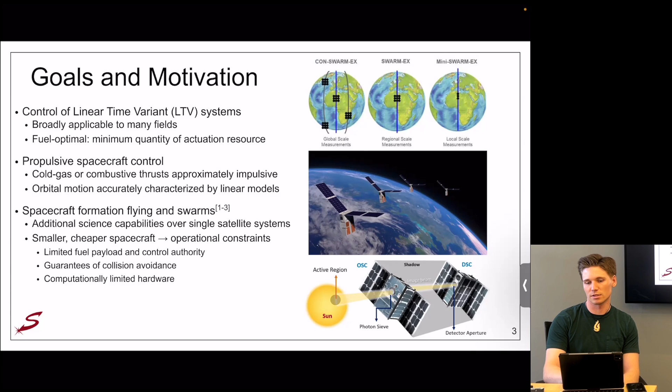So my problem statement for this work is to design an impulsive maneuver planner that leverages optimality conditions derived from reachable set theory to solve trajectories under both convex and non-convex operational constraints with provable bounded optimality and with limited computational load.

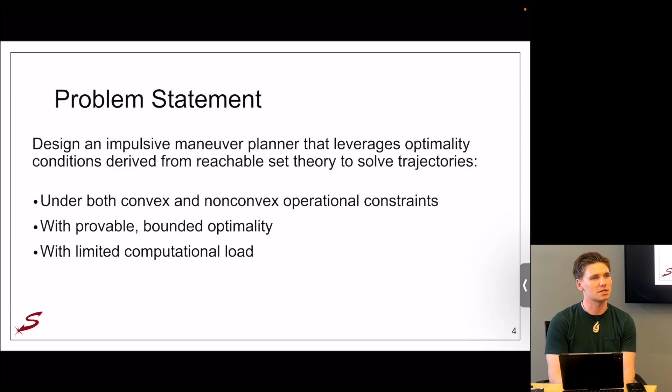Looking at the state of the art for control solvers for both unconstrained and constrained optimal control, they kind of fall into three distinct categories. Closed-form solutions are simple and computationally efficient, but their solutions are often case-specific and can only include limited perturbations and constraints. Closed-form solutions have also been demonstrated on a variety of formation flight missions, such as PRISMA and TanDEM-X.

Numerical optimization techniques, in contrast, offer a wide generality in control problem and control input variables, but they're very computationally intensive, and there's often no optimality guarantees with the methodologies, such as genetic algorithms or particle swarm tree search.

Finally, the most popular approach in literature is indirect optimization because it provides conditions for provably global optimality. It's often a more numerically efficient technique than direct optimization as well, although this can depend on the number of variables considered, as well as the optimality conditions found for the control problem. Indirect optimization techniques can include sequential convex programming, model predictive control, pseudospectral methods, as well as reachable set theory.

However, overall, the literature lacks a numerically simple, provably optimal approach for arbitrary constraints, as well as a guarantee or some metric of global optimality without a significant simplification to the control problem itself.

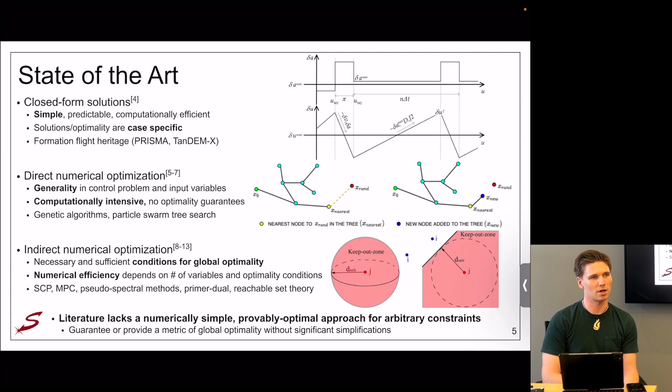So the basis of this work, as I mentioned before, is reachable set theory, which in its simplest, most unconstrained form considers a control problem minimizing the cost of the maneuvers in a control window subject to a linear time variant dynamic constraint. Again, the control actions we're considering for spacecraft control can be considered impulsive, which simplifies both the objective and the dynamic constraint to a simple arithmetic sum of maneuver quantities or functions.

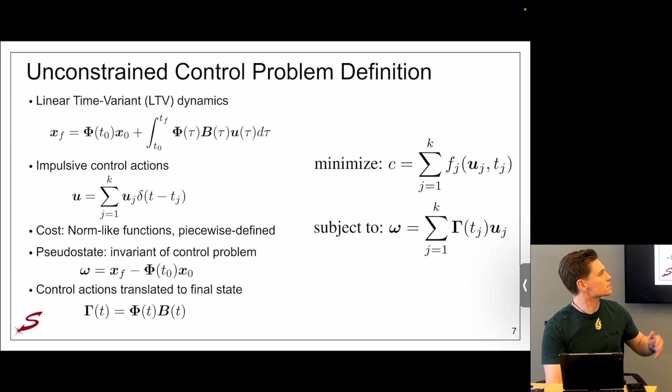The cost is the sum of norm-like cost functions, piecewise defined based on time throughout the control window. The pseudo-state in the dynamic constraint is an invariant of the control problem and is simply the final desired state minus the initial state propagated over the control window. Control actions are similarly translated from the time they occur to the final state, which arrives us at this simple base control problem.

Reachable set theory primarily consists of two sets. The set S is the set of pseudostates omega reached by any single action of a given cost in the control window; S is at specific times, but also can be at times throughout the control window. S star is the set of pseudostates that can be reached by multiple actions of combined cost equal to C. It can be shown that S star is the convex hull of maneuvers in S throughout the control window. This then makes lambda a very important quality of the reachable set, because lambda is an outward normal of a distinct contour of the convex hull.

And this contour lambda is the optimal lambda if it intersects the desired pseudostate at minimum cost. So this control problem we were showing before can be more efficiently solved as its dual, as a maximization problem. We were effectively trying to find this contour of the reachable set that intersects the desired pseudostate at minimum cost.

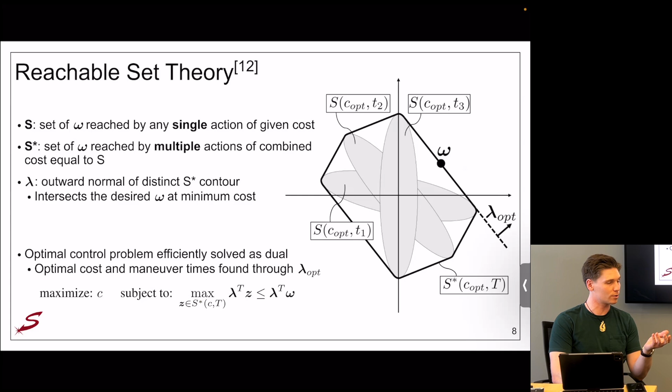Lambda then will give you both the optimal cost of the control problem as well as the optimal maneuver times and directions throughout the control window, all through one single variable. So reachable set theory alone, in its current state, is not enough to accommodate all of these operational constraints that we're looking to accommodate.

Specifically, we need to know the trajectory and the relative maneuver timing between maneuvers throughout the control window to know whether or not they satisfy state constraints on the pseudostate trajectory or timing constraints in between maneuvers. Therefore, consider time ordering the maneuvers considered by the reachable set theory throughout the control window.

And it can be seen that time ordering these maneuvers means that there's no loss of generality of the reachable sets, because simply time ordering the maneuvers does not change the shape of the convex hull S star or its contours that may intersect a desired pseudostate at minimum cost. Therefore, the full control problem can be broken down into intersecting waypoint subproblems, where a waypoint is defined as a spot in pseudostate space where the trajectory reaches after the previous control actions in the control window.

I'll talk about it in a second. What this means is that you get this optimal overlapping substructure, which is very similar to that seen in dynamic programming and allows the application of the principle of optimality often used in dynamic programming, which means that the full optimal solution for the control problem is comprised of optimal solutions to each one of these subproblems.

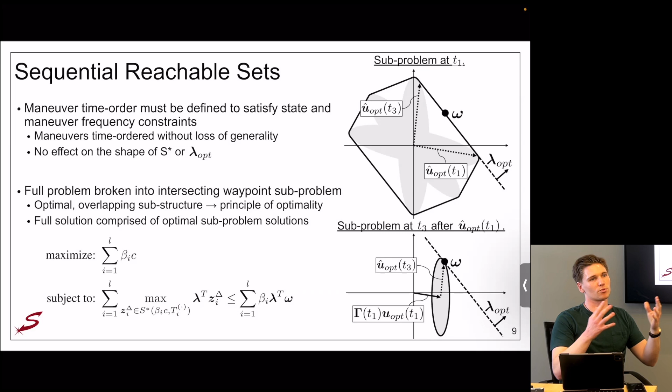If you take the optimal maneuver at T1 and set it at its optimal magnitude, the subproblem at T3 then recovers the exact same lambda, the exact same direction of the optimal maneuver at T3. And so you've then recovered the full optimal control profile. So now that we have this sequential formulation, we want to actually start accommodating operational constraints. This work considers three types of operational constraints.

The first being a state constraint, which is an area of pseudostate space which is inadmissible for the pseudostate trajectory found by the control solver to enter. This can be defined in a non-convex way, just a keep-out ellipse, or convexly as a maximum deviation from some sort of nominal state. It's worth noting that the actual definition that's used at each waypoint subproblem here is slightly more restrictive than simply the inadmissible states alone.

It's actually any maneuver that acts in the direction of an inadmissible state that is reachable given the current magnitude or cost associated with the subproblem. This is done to preserve the linear scaling of the definition of the reachable sets and the nice qualities that it has. And it can be seen that by varying the cost, you can actually recover the full spectrum of maneuvers on the boundary of any constraint space that you're looking for, simply by varying the size of the reachable set.

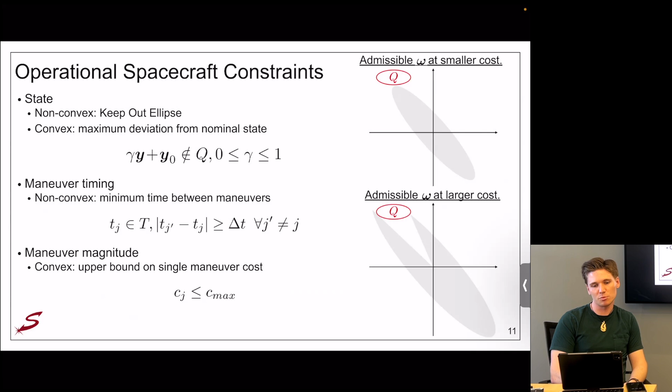Maneuver timing in this work is considered as a non-convex constraint, which is set as a minimum time in between two maneuvers happening in the control window. And maneuver magnitude can be realized as a convex upper bound on single maneuver cost.

So now that we're including constraints, these constraints can be incorporated into the sequential reachable set formulation at each waypoint, meaning that you're satisfying them at each subproblem location. So now you can solve each one of these subproblems, as I said before, without needing to convexify the full control problem. By solving each one of these subproblems, you can again find optimal maneuver locations and times depending on the location of your waypoint and the resulting optimal lambda.

But two gaps have to be addressed to make this into a full control solver. The first is that we don't yet know what the optimal size of each one of these subproblems or the control inputs may be. Specifically, we don't know what the transition between a given subproblem I and the next subproblem I plus one may be, as this is dictated by the optimal maneuver chosen and its magnitude and the resulting waypoint that's created.

To meet this gap, we have derived a set of new subproblem optimality conditions in the frame of increasing a maneuver magnitude until it is no longer optimal with respect to the next waypoint of the control problem. These optimality conditions can be realized as: a maneuver is optimal in the next subproblem if it's optimal as defined by lambda in the next subproblem, it acts in the same direction with equal efficiency to a maneuver that's optimal in the next subproblem, and it does not increase the lower bound on optimal cost. Effectively, if any of these conditions are true, the maneuver is still optimal and you have not actually realized the transition between your current subproblem and the next subproblem.

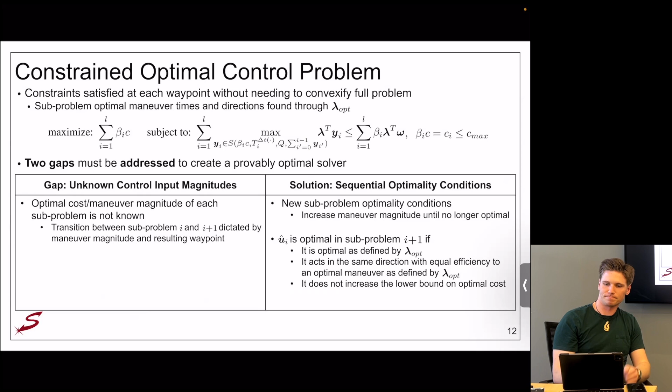The second gap that must be addressed is this constraint. Because we have added so many operational constraints to the constraint of the control problem, the constraint can no longer be expressed analytically. And actually solving this exactly requires evaluating many maneuver direction samples, which introduces a prohibitive computational load to solve the problem.

Instead of solving this explicitly, consider solving the problem implicitly as a bound on unconstrained optimality loss. You then take advantage of the numerical efficiency of solving the unconstrained problem, and then can simply check an arbitrary number of constrained maneuver samples against a user-defined suboptimality bound. As long as one of the samples that you have fits within this bound, you've satisfied the constraint.

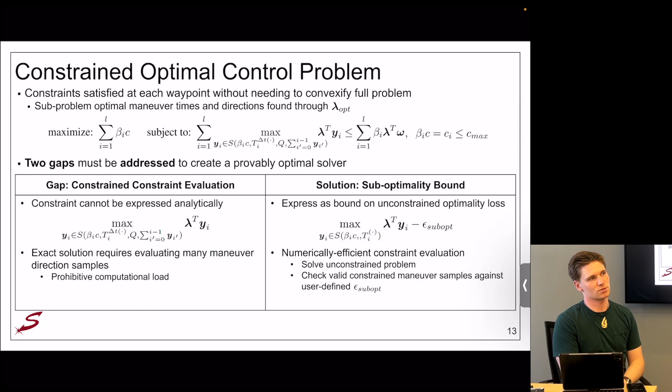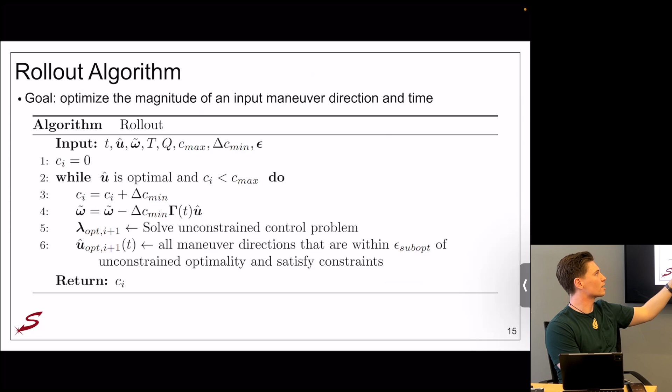So to build a computationally efficient constraint solver for DSS, it is primarily composed of two algorithms. The first algorithm, which is used by the second algorithm, is rollout, with the goal of optimizing the magnitude of a given maneuver direction and time to find this transition between one subproblem and another subproblem. You start with a magnitude of 0, and you increase the maneuver magnitude until the maneuver is no longer optimal at the resulting subproblem. So it's steps of increasing maneuver magnitude, finding the next waypoint, solving the unconstrained control problem, and finding a new set of optimal maneuvers that satisfy the constraints and are within the user-defined suboptimality bound of unconstrained optimality. You effectively continue to roll out maneuver magnitude until a new subproblem is realized.

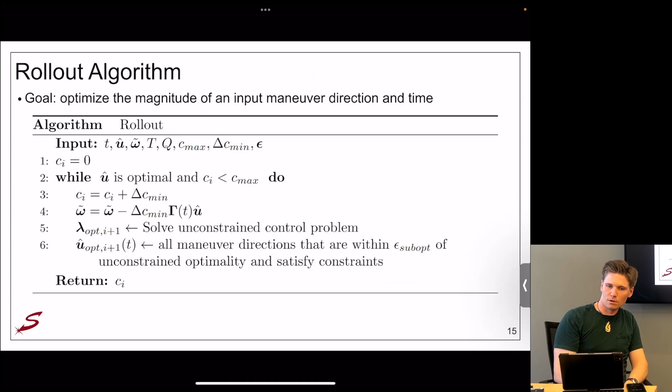The second algorithm that uses rollout is branching. The goal of branching is to solve the sequential constrained maneuvering until the remaining control problem can be solved and satisfy the constraints with unconstrained maneuvering. It begins by starting with the unconstrained maneuver plan and checking it against the operational constraints of the control problem. If one of the operational constraints is violated, the constrained optimal maneuver, defined as above with the user-defined suboptimality bound, that is closest to the beginning of the control window, is rolled out, added to the maneuver plan, and the reduced control problem is found.

This sequential time ordering that we've done before can be done either forwards or backwards in time. So to reduce time and make the problem more efficient, we can also do this backwards. So we also roll out the optimal maneuver closest to the end of the control window. We then again solve the unconstrained control problem and check it against the operational constraints and repeat this until the unconstrained maneuver plan meets the constraints and we have a full maneuver plan with bounded optimality that satisfies the operational constraints. While we're doing this, we're also keeping track of the potential optimality that is being lost by the approach.

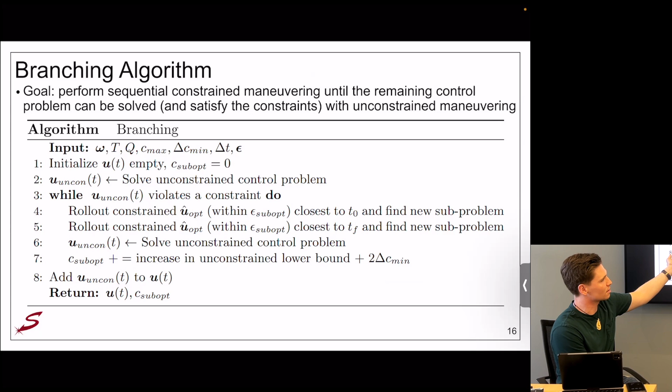This can be found at each iteration by increasing this value by the increase in the unconstrained lower bound due to using this maneuver sampling process, as well as the maneuver sample size, delta C min, used to find the maneuver magnitudes in rollout each time.

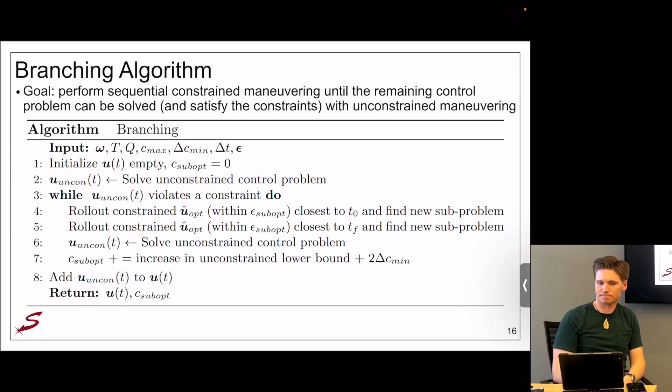To simulate and validate this algorithm, I'm going to be using an example test case of distributed space systems, which is defined as deputy relative motion linearized about a non-maneuvering chief reference orbit. These systems are commonly parameterized by relative orbital elements for the deputy state, which are defined on the right there in radial, tangential, normal relative motion space for bounded relative motion.

Each one of the scenarios I'll be showing today consists of a Monte Carlo simulation of 200 runs with randomized pseudostates and operational constraints. The two main scenarios I'm going to be using as illustrative are a walking safety ellipse, which is a change in tangential separation while accomplishing passive safety with bounded out-of-plane relative motion, and also with primarily, or in this case only, convex operational constraints.

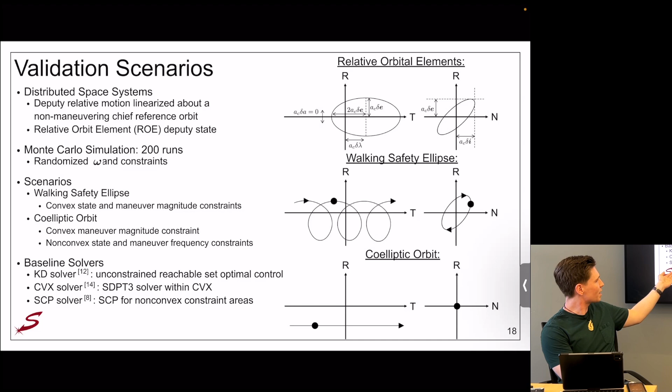The second scenario is the co-elliptic orbit, which will use both convex and non-convex operational constraints. It's also a change in tangential separation between the chief and deputy with minimal out-of-plane motion. The baseline solvers that will be compared against the proposed solver are an unconstrained reachable set optimal control solver, a solver within the CVX software package, and an SCP for non-convex constraint areas.

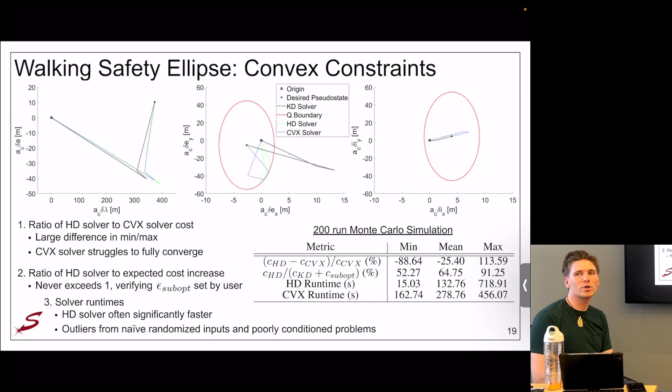Looking at the Monte Carlo run specifically, there are three important metrics to look at. The first is the ratio of the proposed solver cost to CVX solver cost, which should be finding an optimal solution to this convex control problem. However, when you try to apply CVX to a similar control problem as is found by the HD solver, you'll notice there's a large difference in the min and max costs found by the solvers. And this is because the CVX solver is really struggling to converge to the same accuracy as the HD solver.

The CVX solver in this case, as we go a bit more into in the paper, is actually using fewer input control variables than the HD solver is. And even at that point, the CVX solver is struggling to converge with the number of maneuver locations and times, as well as the number of constraints of the control problem.

The second important metric is this ratio of HD solver costs to the expected cost increase as incurred by the sequential setup. As I mentioned before, we're keeping track of what the worst case increase in optimality could be. We see that this quantity never exceeds 1, meaning that we have successfully guaranteed an optimality bound on maneuver plan cost set by the user.

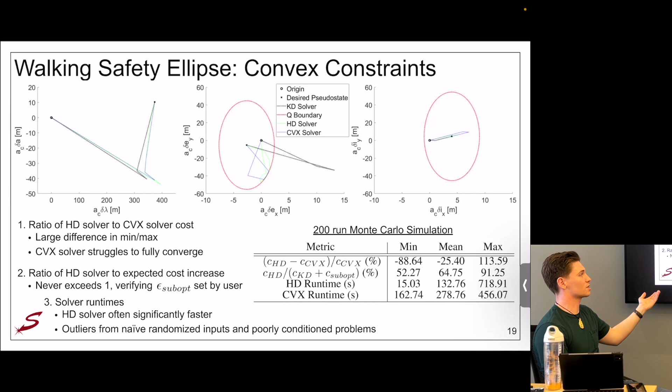Finally, looking at solver runtimes, the HD solver, the proposed solver, is often significantly faster than CVX, with outliers occurring due to naive randomized inputs in the Monte Carlo simulation process, which results in poorly conditioned problems that create many small maneuvers in the sequential setup.

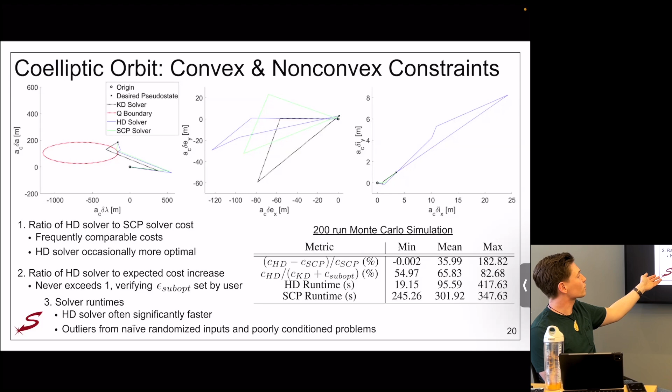The co-elliptic orbit is a very similar layout here, where instead the state boundary is a keep-out ellipsoid instead of retaining the trajectory inside. Looking at the Monte Carlo simulation again, the HD solver, the proposed solver, frequently finds comparable costs to the SCP and is occasionally more optimal. It's also still guaranteeing and satisfying the user-set optimality bound. The big difference here is that the proposed solver often is significantly faster than SCP, with outliers again occurring due to naive randomized inputs in the Monte Carlo simulation.

So in conclusion, reachable set theory provides insight into the nature of optimal maneuvering, and the sequential approach recovers the optimal cost of unconstrained control within the expected optimality losses of maneuver magnitude optimization. Constraints are implemented at the subproblem level while guaranteeing optimality bounds without having to convexify the full control problem. The proposed solver finds valid maneuver plans within the user-specified optimality bounds with cost comparable to solvers in the literature and significant improvements in algorithmic runtime, especially for non-convex problems.

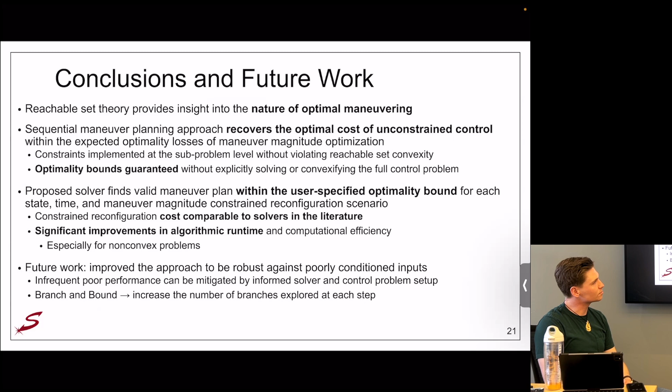The main future work is robustifying the proposed solver to these naive randomized inputs. This can be done either with a better, more informed solver and control problem setup, or by expanding the branching and bounding technique used by the solver, such as increasing the number of branches explored at each step, such that the solver does not get stuck in places with little controllability.